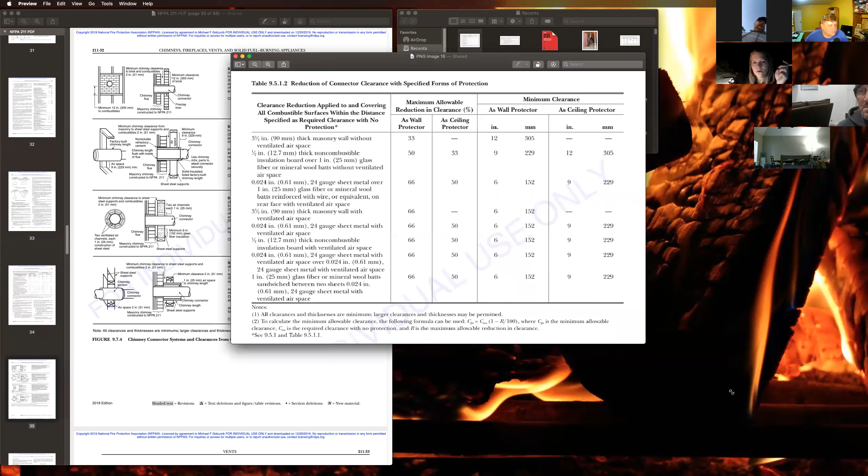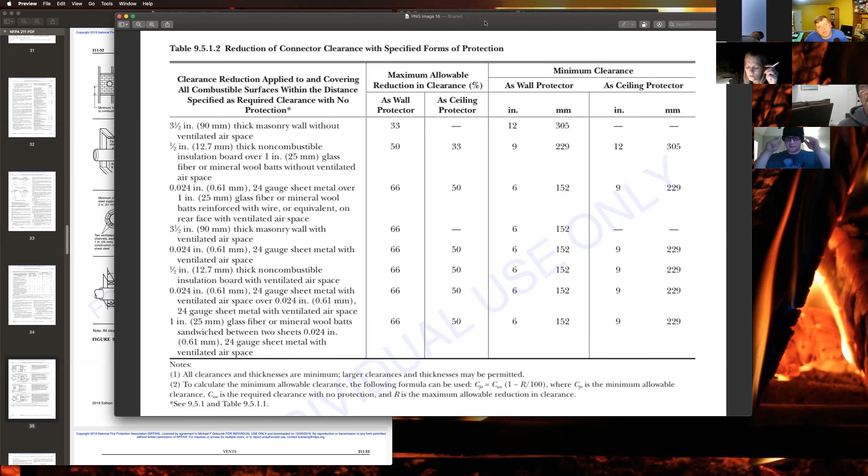So with that said, where is my... not that one. It's... this one? Yes, that one. Okay, so...

It's like daylight there, look at that. Oh, it's dark as shit here. Yeah, it's barely daylight. Like it would be dark walking around outside. There's just a little bit of light left in the sky. And Marty's facing back towards the sunset.

So right here in the middle of my screen, appliances. Chad's having a little bit of an issue with this exact set of numbers, and he wanted me to make sure you guys had this information.

In the testing, they're only asking you a few different things, but the easiest thing to know is that there's only 3 reductions to wall clearance, and there's only 2 reductions to ceiling clearance. Only 3 to wall, 2 to ceiling.

And that's the reduction. Don't worry. Brock, I just finished my dinner as well. There you go. Okay.

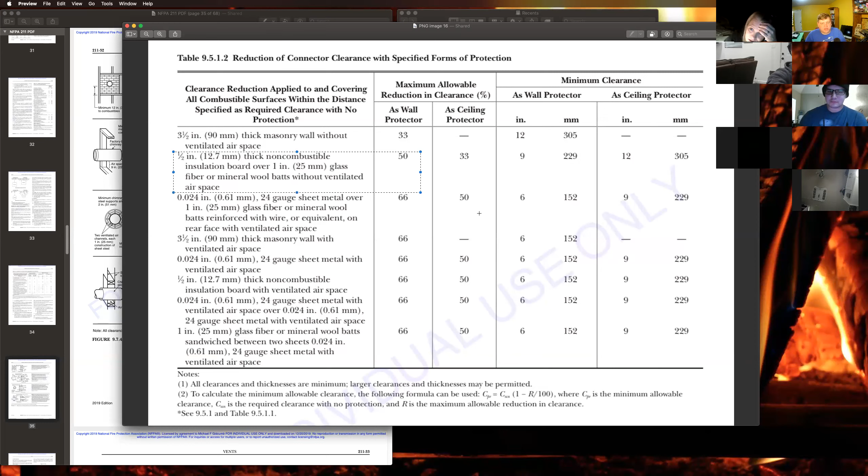How about just this page? Yeah, just this page. Oh well, isn't it in the book? I don't have a book. She doesn't have a book. It's in the NFPA, you can print it out from there. This exact page is in the NFPA.

Yeah, that's where I got this from. I just screenshot the NFPA. If you got the email on Connect Team for NFPA, you can take that and send it to the printer and print out the whole book. How big is that book? About 66 or 67 pages. It's in the NFPA 211 book. If you pull it up on Connect Team, which is what we went through Tuesday night, you can watch that video, it'll show you how to pull it up.

So, ceiling protectors. There's only 2 numbers you need to know for ceiling protectors. The first one: going back to your half inch thick, non-combustible board with no air gap, as a ceiling protector, that's a 33% reduction. And then anything else that it references as a ceiling protector is 50%.

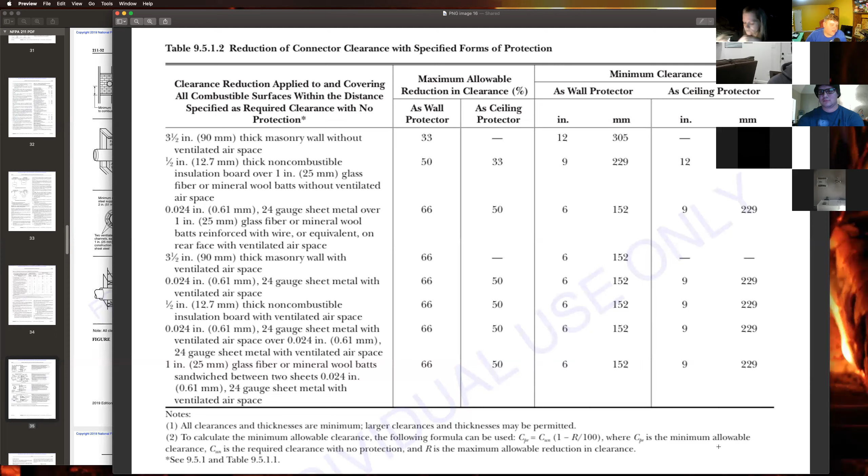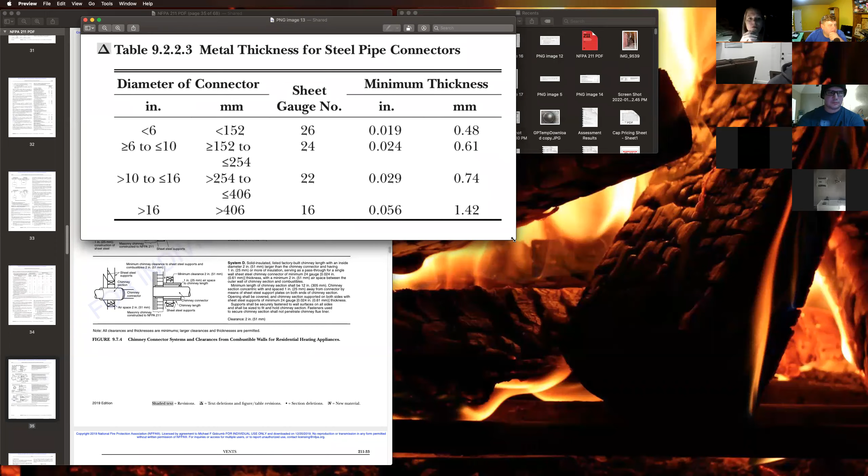Everybody got that? Okay, I'm going to set this off to the side and I'll email this one page. Well, that's fine, and I'll also print that guide off, the NFPA 211 book, like you were telling me. Cody, I just screenshotted it and sent it to Connect Team. I saw that, thank you. You're welcome.

So this is the other set of numbers you need to know - steel pipe connectors. You need to know 26, 24, 22, and 16.

When we're talking about the diameter of the flue pipe - the diameter of your round flue pipe - for individual diameters or ranges of diameters of flue pipe, the sheet metal has to be different thicknesses. As you have a larger diameter flue pipe, you're able to vent more, which means the firebox is going to be larger, and so on. You're going to be moving more heat, so it has to be more heat resistant. To do that, it has to be a thicker metal because it has to stand up.

So less than 6 inches in diameter - does everybody know what a diameter is? Yes, it's the circle from left to right, that is the diameter, right? So a pipe that is less than 6 inches will always be made from 26 gauge sheet metal. Less than 6 inches diameter, always 26 gauge sheet metal.

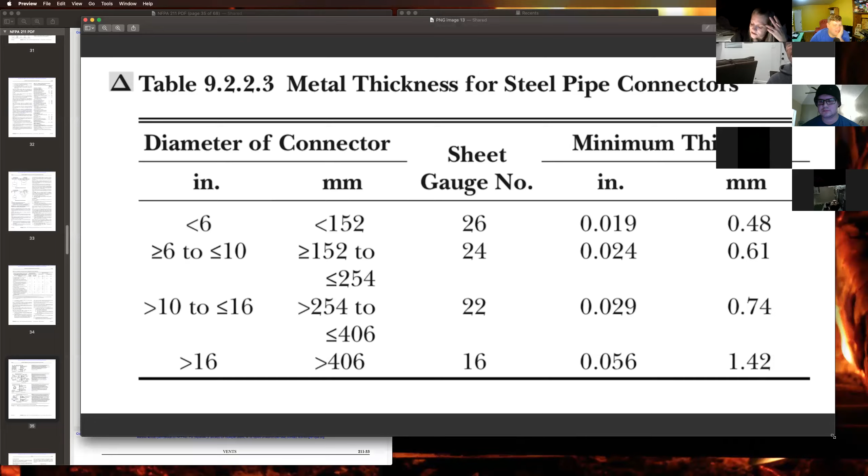The higher the gauge, the thinner the metal. Yep, the more times you hit it.

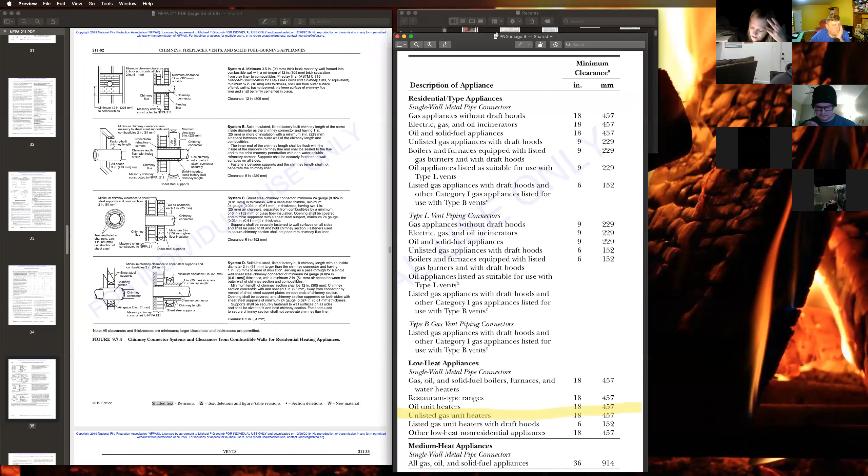I mean, it makes perfect sense once you think about it. It really does, I said. You should hear some of the stuff Joe has for his different ways of remembering, like the UL codes and things.

Okay, the lower the gauge... Mm, see here, so that takes care of those. What was okay?

So the next thing that we're going to be talking about is clearance to combustibles for different appliance types.

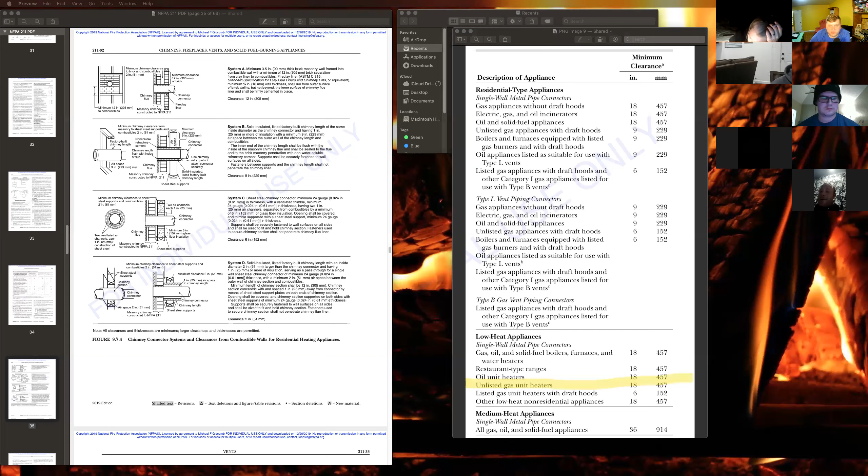Hold on - with that, a wood stove is considered a medium heat appliance with a single wall metal pipe connector. So this is where it gets fun. Medium heat appliances with single wall metal pipe connectors, and that doesn't matter if it's gas, oil, or solid fuel. You said single wall pipe connectors, right?

And it's 36 inches clearance to combustibles. So we know that - a wood stove is 36 inches clearance to combustibles.

And then we're going to come back over here to this other page. One of the questions on the test is: if you have a wood stove, automatically you know 36 inches clearance to combustibles for a wood stove, right?

If you have a wood stove that is behind or in front of a 3.5 inch thick masonry wall with a 1-inch air gap, what is its clearance to combustibles?

So you already know that the stove itself, without any kind of protection, is 36 inches. On this page right here, with the first one that we went over, it's right here - a 3.5 inch thick masonry wall with a ventilated airspace reduces clearance by 66%, or 2/3.

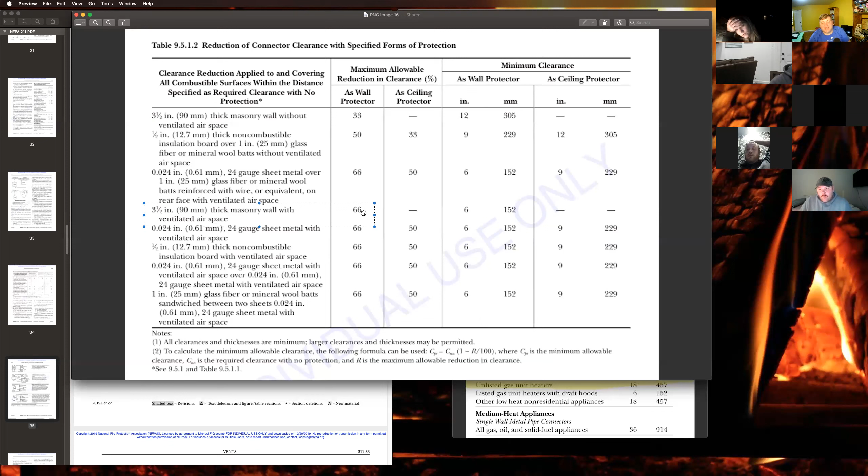So if the wood stove is 36 inches and it's behind the 3.5 inch thick masonry wall with a ventilated airspace, then it's reduced by 2/3. So that means its clearance to combustibles is now only 12 inches.

It's weird because you don't have the number memorized yet, trust me, but it'll make sense. So right at the bottom of this page here, wood stove clearance to combustibles is 36 inches.

The question on the test is if you have a wood stove sitting in front of a brick wall with a 1-inch air gap, how far should it be away from combustible materials? So the wood stove starts at 36 inches, but when you're adding the brick wall with the airspace, you can take some of that 36 inches away. That's where this little paper comes in right here that says you're going to reduce that 36 inches by 66%.

So it's like a 66% discount at Macy's or Best Buy, open box, 66% off.

So if your wood stove needs 3 foot of space before it can get near a wall that could catch on fire, but you don't want it sticking 3 feet out into the room, the easiest way to get it really close to the wall is to build up a brick wall with a 1-inch air gap, and then the thing can be 12 inches away from the combustible wall, because it's reducing it 66%. So the brick wall isn't considered the combustible wall - it's a masonry product, a non-combustible wall. So we're talking clearance to the combustible.

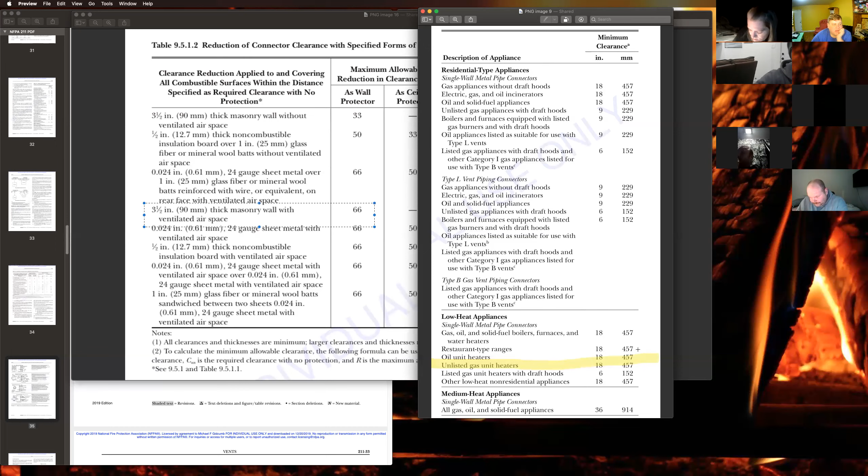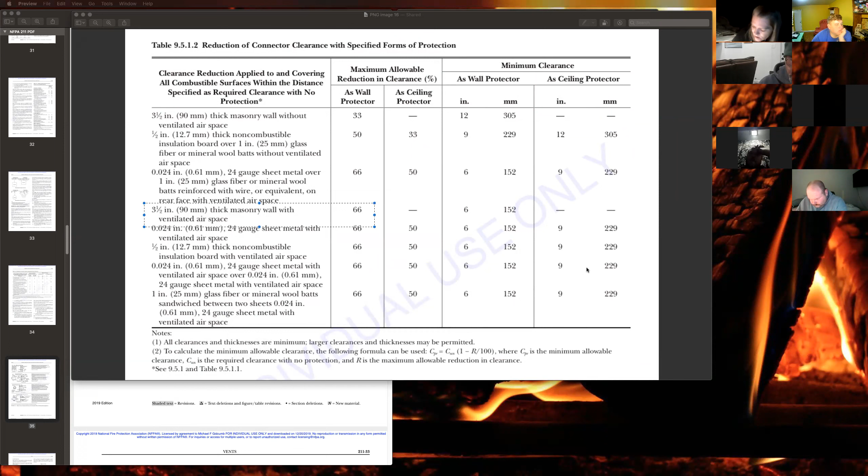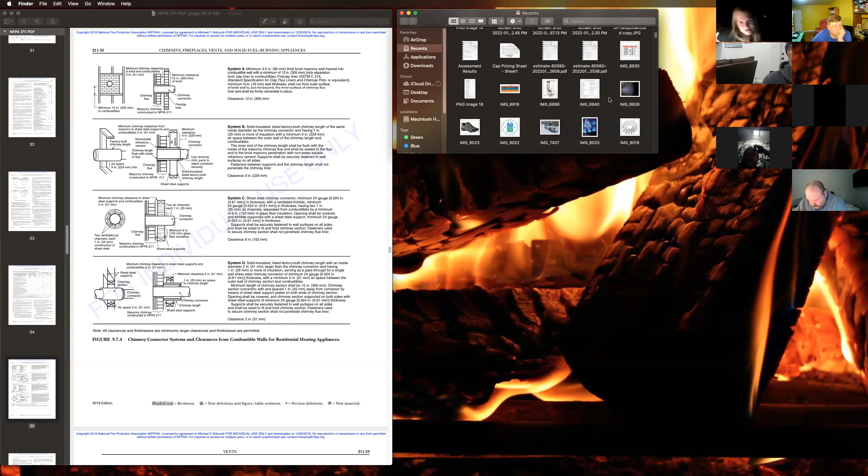So hold on, I got him putting this in parentheses: X is equal to the distance between the outer wall of the flue pipe and the combustible material. Now this literally only has to be 1 foot - that's if you had a brick wall right here with the 1 inch airspace. Now this flue can scoot over there. That's all.

When that question kept coming, you know what I was picturing in my head? A freaking spark arrestor, I don't know why - that's why I kept getting it wrong. I was picturing a spark arrestor, seriously. Okay, so we all need like a Cody and a Brian sitting right next to us to draw diagrams, dang it.

That's why we're here.

Another thing I'm going to send you guys is this one. These pictures are on the Connect Team test. So if you take the 45 degree test on Connect Team, the pictures are in it. I wanted to give you these pages so when it asks a question about the wood stove with the masonry wall, I give you the information in the pictures to pick the right thing. All you have to do is look at the picture and read it, and that will help you associate the question with the picture.

So in this one, one of the questions was the clearance: what is the clearance to combustibles if a mantel protrudes 3 inches, which is this right here. For the clearance to combustibles, you come down, you come over, you come down. There you go, it's 14 inches.

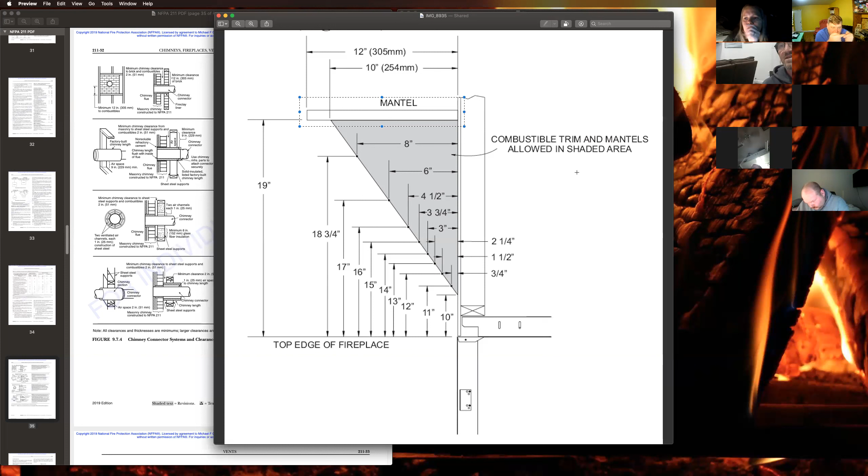Is that one of the questions that was wrong? Yes, that's one of the questions that's wrong. Right, anything under 1.5 inches is 6 inches between the firebox and where the mantle can be, as long as it protrudes less than 1.5 inches. And then anything more than 1.5 inches, at 1.5 inches it's 12. Less than 1.5 is 6, anything more than 1.5 is 12, is what it says. But you're saying it's actually 14.

At 3 inches, which is the question on the test, at 3 inches. So if a mantel sticks out from the wall 3 inches, how far above the opening of the fireplace does it need to be? The answer is 14 inches. Okay, so I've got my mantle here - when you say protrude, you mean how far it's sticking out, like here. So if it's sticking out 3 inches from the top of the firebox, the mantle has to be 14 inches.

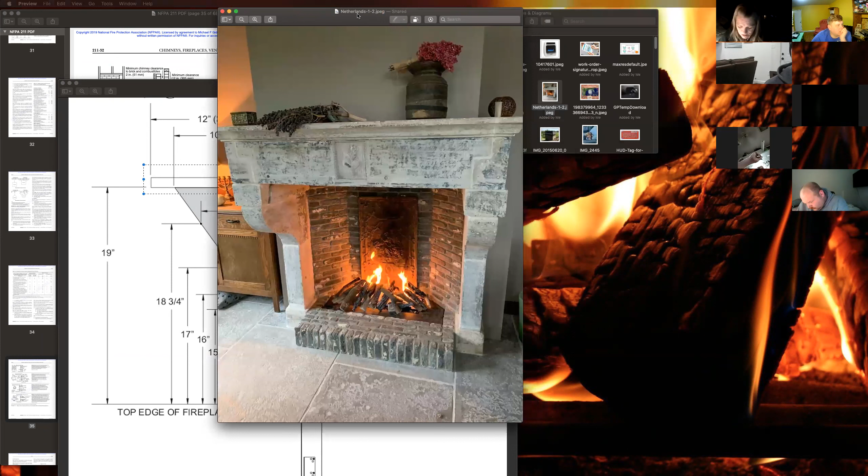But that's not how it says it on the practice thing - it just literally says 12. It doesn't say that's for more than the 1.5 inch. Yeah, that's the practice test.

That's why I was asking if that was one of the ones that felt like it was wrong. Right, so here we go.

This diagram is in the NFPA - sorry, NFPA. Yeah, I'm learning, okay? So this right here is the mantel up here - right, so this bit here is the mantle. So this mantle, if it sticks out 3 inches, it has to be 14 inches - this distance here has to measure 14 inches.

So this is my ignorance - is a mantel always just the top portion that goes across? No, it can be the side too, but that's a different measurement. This wider portion under the edge you're talking about, that's your clearance space. This one isn't a great picture to use for that, but the mantle is generally where somebody's going to set stuff on, like a little ledge across, right? So yes, that's that area right there.

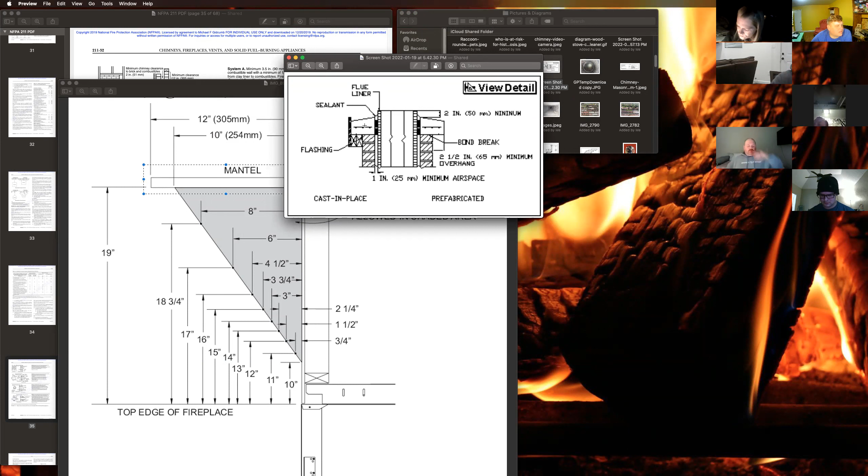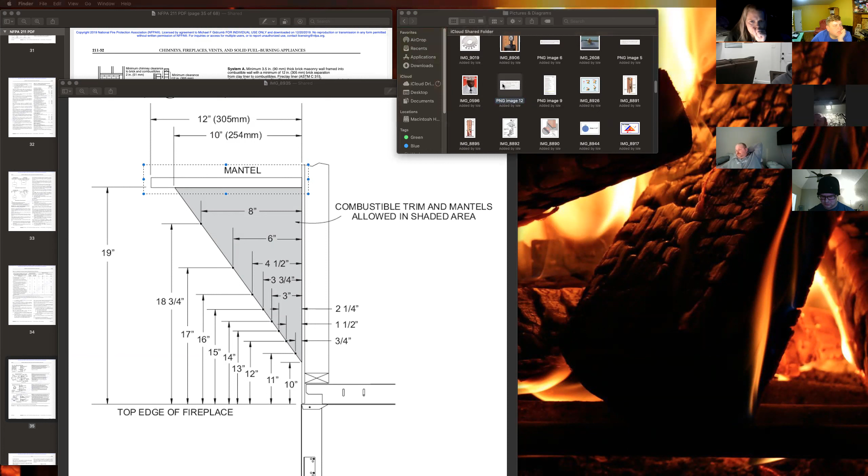Where are we? I think this one here. No, not that one - that one there. Check half-inch side laps - I'm looking at a really small representation of all this stuff, trying to find the right one. Oh, here we go. This is... nope, that one's still wrong. Okay, I'll have to find the right picture for that one.

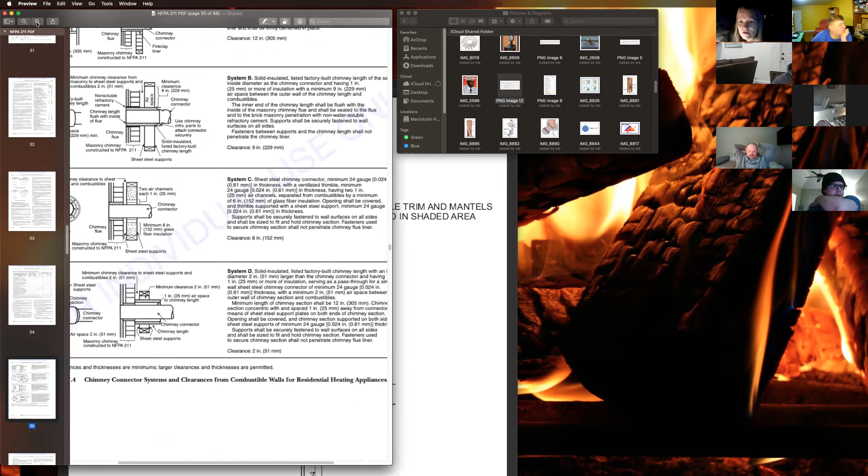That was the mantel. What are you - where's my other measurements?

Did I already pull it up? Oh, actually I've already pulled it up. Let's take shots because I would literally be drunk already.

Okay, so it's going to ask you about the wall thimble passing through a 3.5-inch masonry wall and its clearance to combustibles.

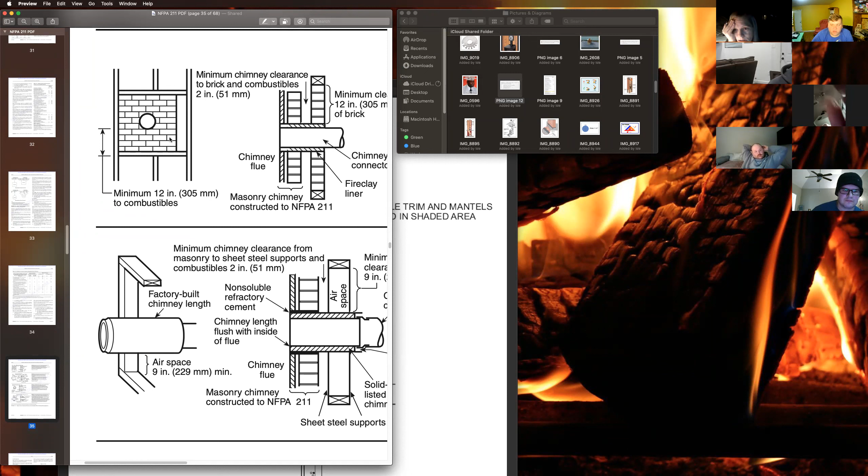So it's a 3.5-inch masonry wall. Any single wall connector pipe that passes through a wall has to go through a thimble. A thimble is literally a metal sleeve that goes through the wall first, and then the pipe, being slightly smaller, goes through that. An example would be like a wood stove, right? The thimble is slid into the wall and then the pipe is slid through it.

So with the previous question that we worked on, for any single wall pipe or connector that is for a medium heat appliance, what is the standard clearance to combustibles?

Okay, 36 inches, right, 36. So now we're passing through 3.5 inches of masonry with a 1 inch air gap, so that reduces it. We're going to reduce that 36 inches, reduce it by 66.

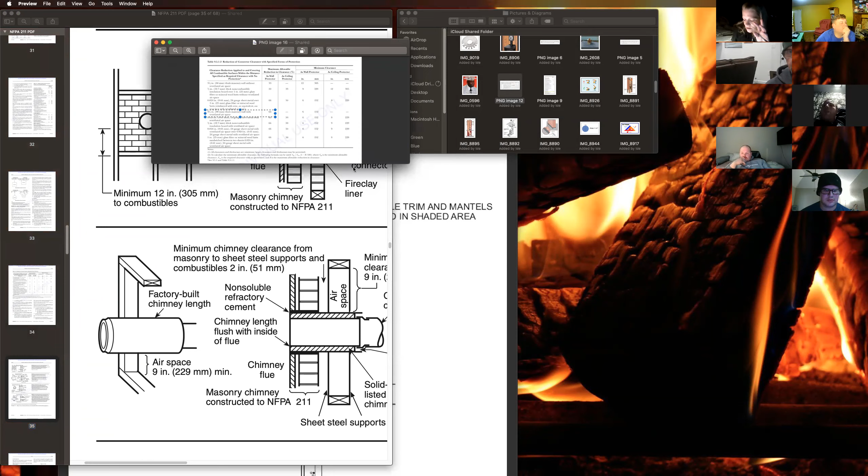With masonry, you have to know the clearance of the original appliance, and then you can do the clearance minus the reduction for the wall. So we're back to a wood stove. We know it's 36 inches, and it's going to go through a thimble that's in a wall that has 3.5 inches of masonry with a 1 inch air gap,

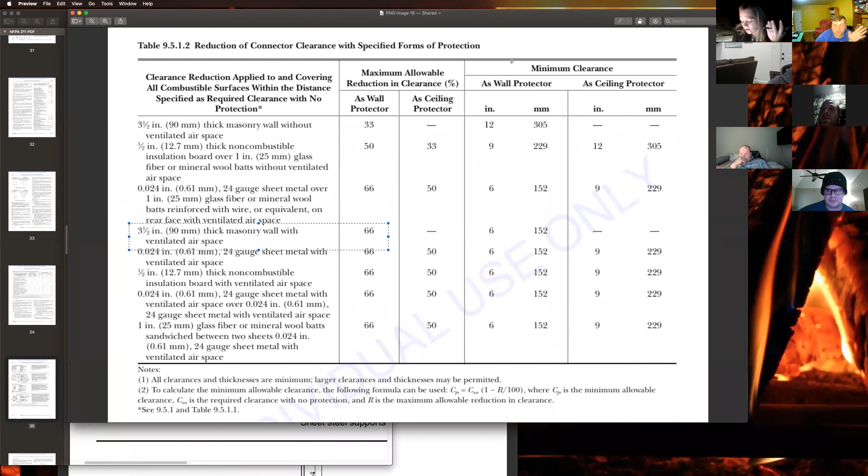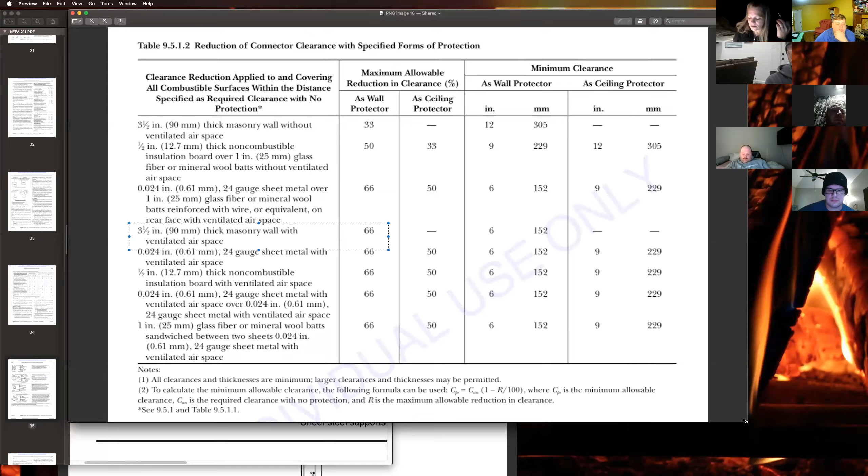which is going to reduce it by how much? Does the thimble not reduce it more? You're still reducing by the same amount overall. Is it 12? It's 12.25, but if you're doing the exact math, the book says 12.24. But in the book it says 12 inches. Okay, 12 inches is the number to know.

See, I told you it's easy. If not, you're just now hearing this for the first time. Once you've looked at it a few times, it's a lot easier. Same thing with the prefab masonry, right? 12 inches.

What do you mean? Would it be the same clearance to combustibles with something like that? I don't know, you've got an NFPA. Is a prefab a single wall connector or a dual wall connector? Double wall connector? So we'd have to know the clearance to combustibles based on that.

What is the easiest place to find information on clearance to combustibles for any prefab fireplace? The NFPA 211? Nope, the easiest place is the manufacturer's instructions. The manufacturer's installation manual. Flashcards, baby, flashcards.

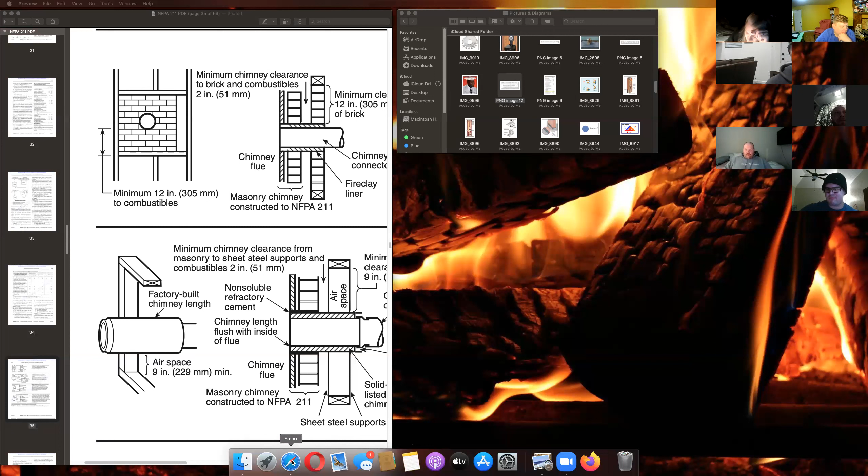Exterior chimney clearance to combustible. Got a nice little refresher on that today, on that last one. The exterior chimney clearance to combustible is 1 inch.

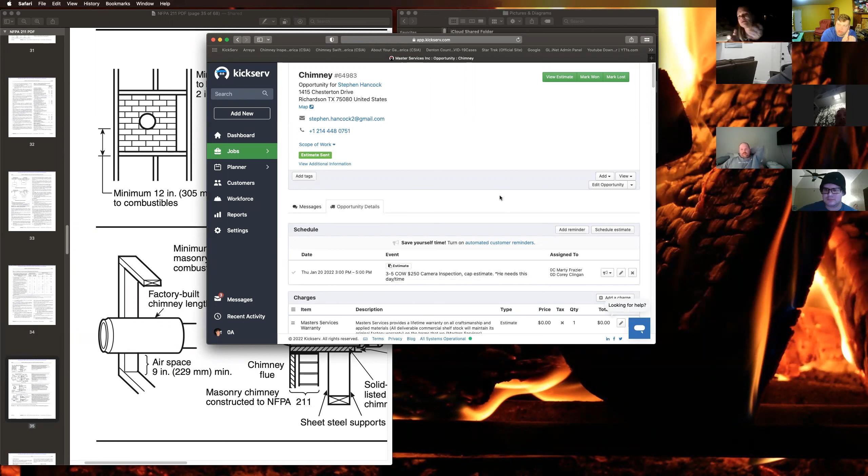So when you're saying interior, exterior, I know you guys are probably tired of hearing me talk, but are we talking inside the home versus outside the home? Interior means the chimney is in the middle of the house and comes up through the roof. Exterior is when the chimney's on the side of the house, on an exterior wall. So interior means middle of home, and exterior means when it's on an exterior wall, side.

This is the one that Corey and Marty were at earlier. They were talking about, oh my God, what is that? This chimney going up through the middle of the house, right up here. They were worried about the wood touching the brick at this point, because they were worried about clearance to combustibles.

But when we measure for clearance to combustibles, what are we measuring from and to? From the wood to the brick? We're measuring from the outer wall of the flue pipe to the combustible material. So the flue pipe is running through the center here, inside the brick.

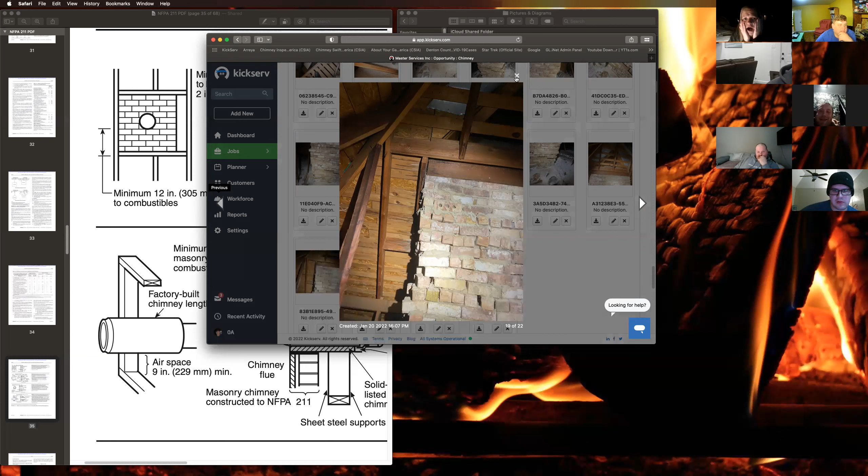Assuming it has a 4-inch air gap, it's okay. Well, even if it has a half inch air gap, it's still okay, because this chimney is interior to the house. So if it has a half inch air gap and this is 3.5 inch brick, that's 4 inches between the flue pipe and the combustible wood. That's double what it needs since it's an interior chimney, it only needs 2 inches.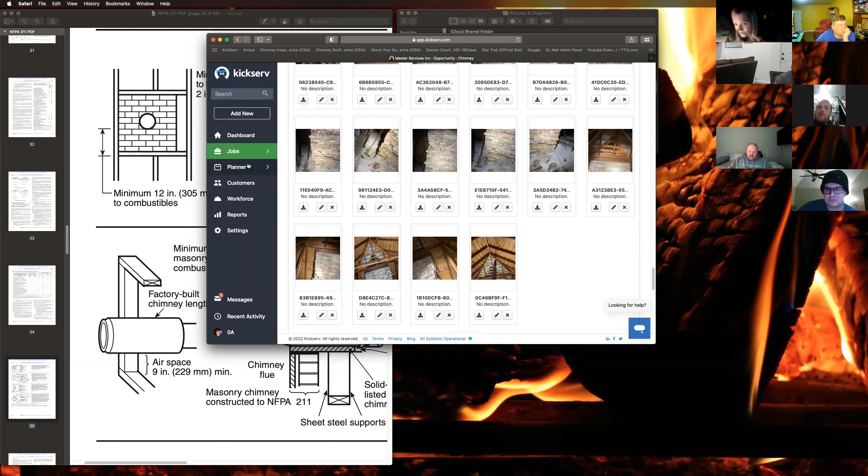They were just looking at it because they saw wood touching brick, and there's a fireplace down there. So I'm just in complete awe of how they stacked that brick. It's never pretty in the attic, it's never pretty in the getting over to it on outside. Oh, it's horrible on the outside too.

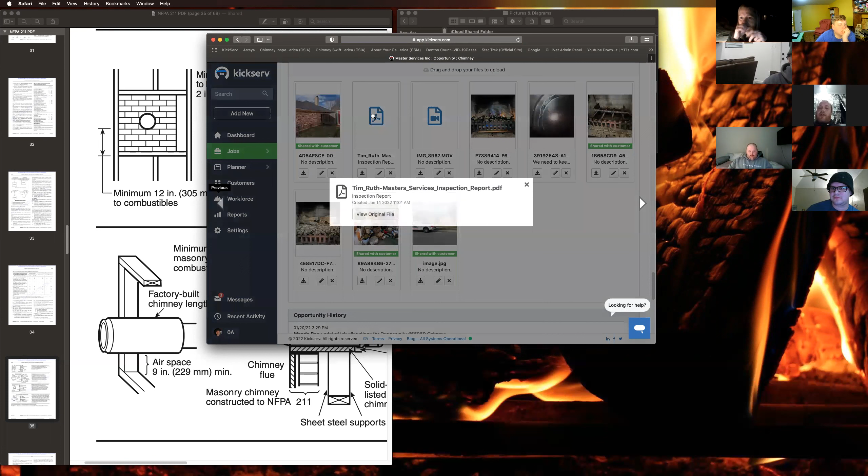So when you guys are out here doing these inspections and you're inside the attic like that, you've obviously already been downstairs or wherever and been at the firebox itself. Have you already run the camera so you have an idea of what's going on? Like, how do you know the flue isn't crooked inside and now you don't have your 4 inches, your 2 inches? How are you judging that?

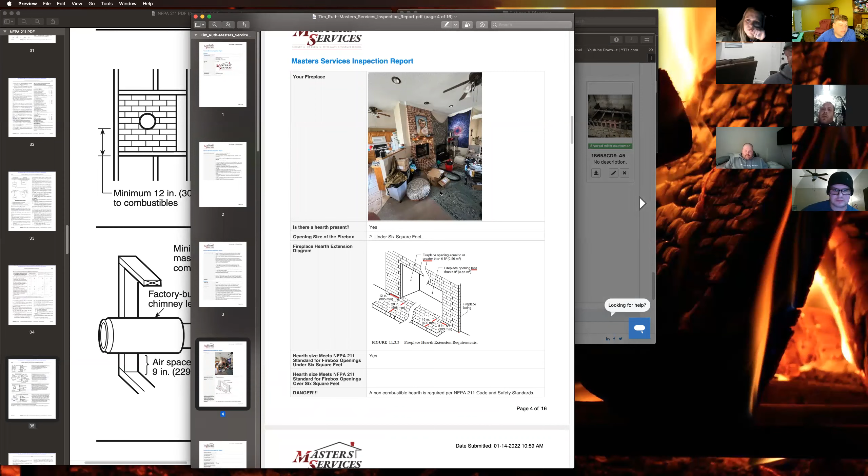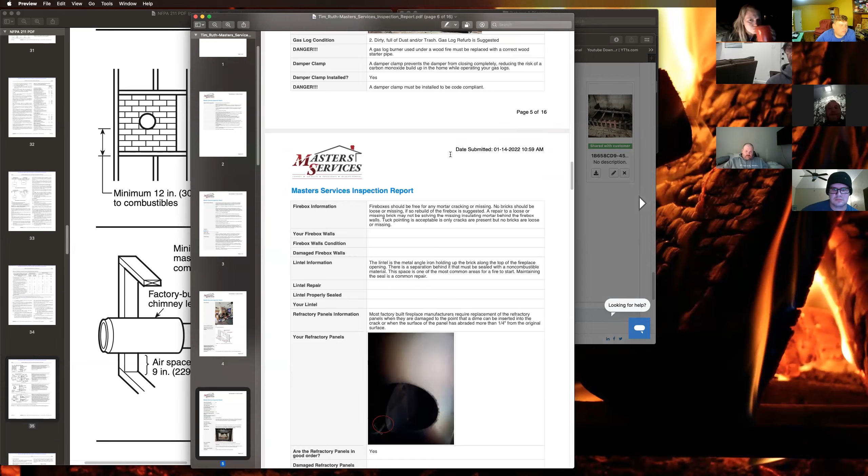You have a cracked flue, that's a whole different problem. But you get what I'm saying? It should run straight up the center and then they build around it. There's no way to tell if it really has the air gap without a level 3 inspection, assuming masonry, they built it correctly. That's when we get into another number that we're gonna know.

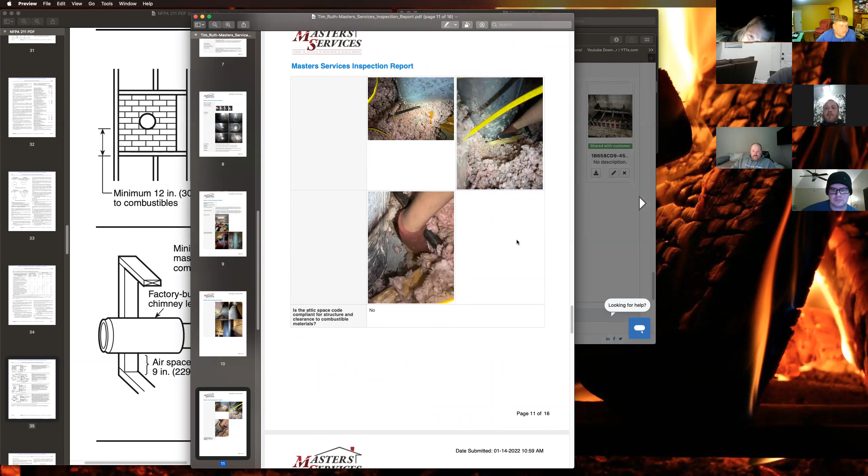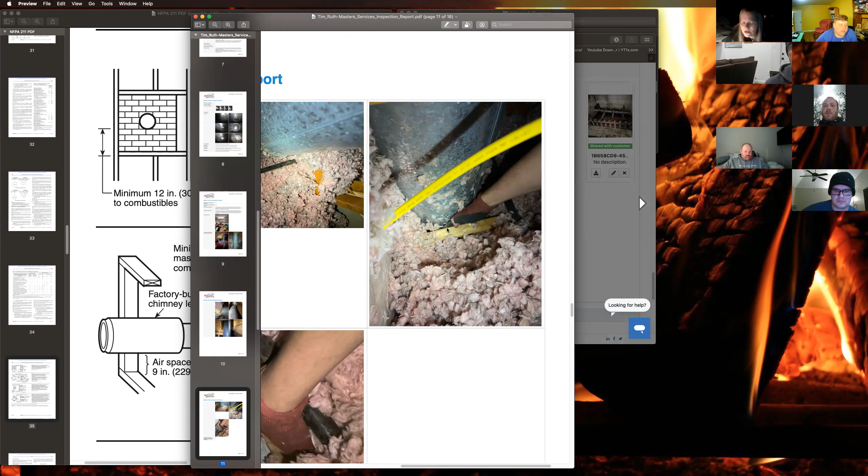So on this one, this is the customer we were talking about earlier, Angela. Down here in the inspection reports, when it asks about did you get in the attic, like that, right? So we're looking, this is the fire stop here, and we're looking for the clearance to combustibles. So we have areas like this, which isn't really, but what I'm trying to understand, isn't that insulation considered combustible?

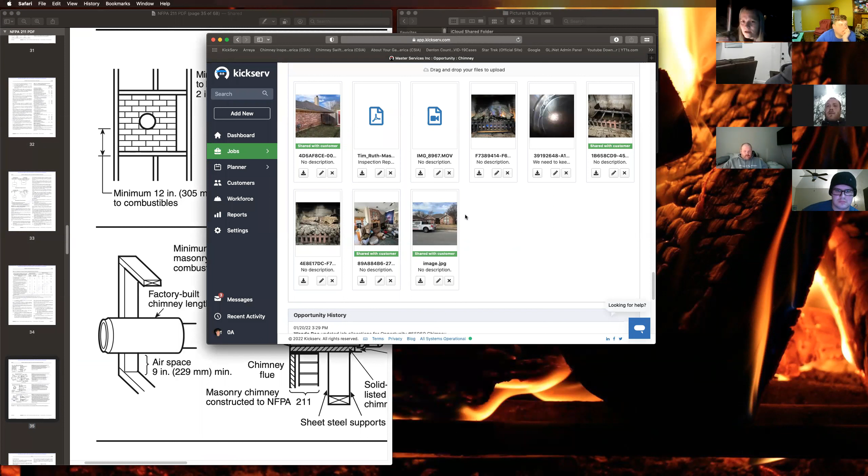The insulation should never be touching the flue pipe. That is one of the questions: should the flue pipe ever have insulation touching it? The answer is no. And then we're looking, you see how Corey's got his hand down in there, he's trying to show that the clearance to combustibles between the pipe and the wood is not there either.

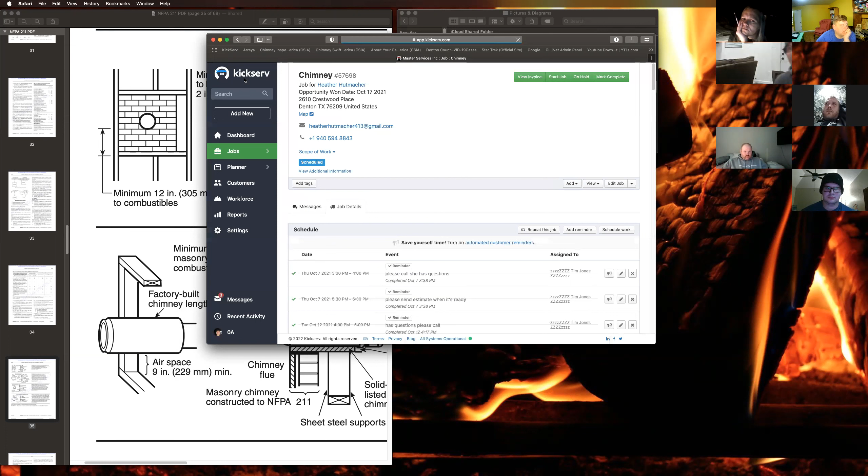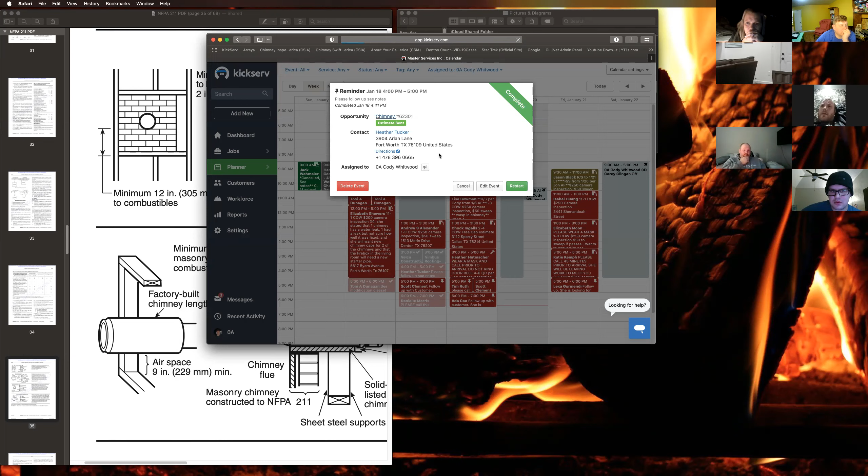So this is a prefab, right? Yeah, it's got the metal piping. And do they run them through the middle of the home like that with nothing around them? Yes, because it only has to have 2 inches of clearance, so as long as you don't have any combustible material within 2 inches, it's good, if it's a double wall or dual wall pipe.

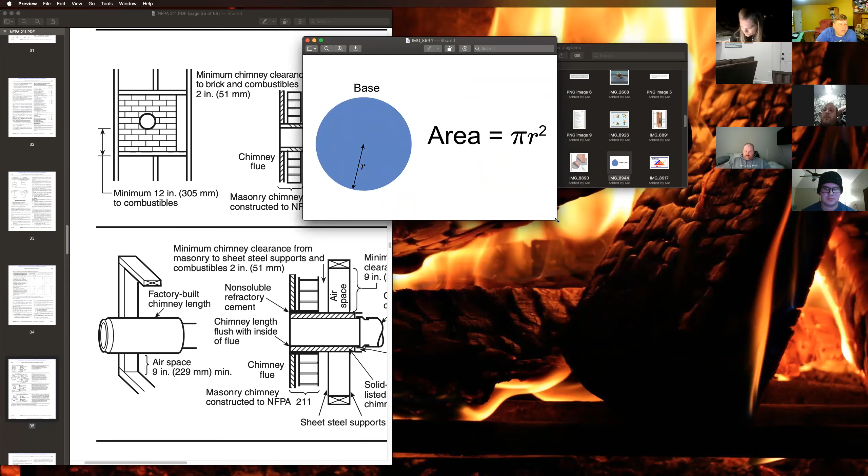Another good masonry to look at would be Jason Babb if you're looking for one. No, prefabs are 2-inch, masonry is essentially 4-inch, or terracotta is, but if you have brick in front of it, that's another thing.

So another number you guys need to know is how to find the area of a circle. I just learned this today - I never thought I'd use this after school. Do you know how to find the volume of a sphere? No, let's not confuse Angela. Okay, so the area of a circle - this gets a little wonky.

So if you're trying to find the area of, let's say, an 8-inch flue pipe - when we say 8-inch flue pipe, we're talking about the inside diameter, side to side, from my fingertips to my thumb tips down here. That's 8 inches.

To find the area of the circle, we need to know the radius of the circle. So just from this center point here out towards the edge, as it radiates like a beam of light. If you imagine the sun being at the center of the circle and radiating heat and light towards the outside of the circle, that's the radius. So I've got my circle from here to here - that equals the radius, which is R. The radius is always half of the diameter.

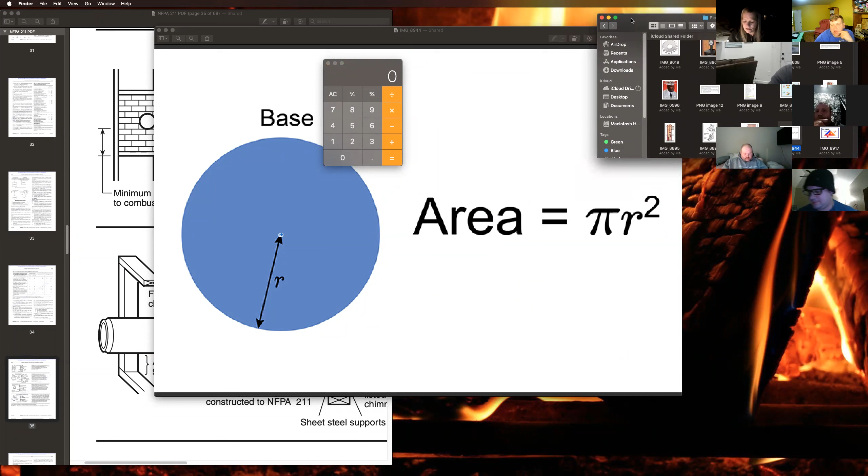Okay, you want to know why we don't do diameter times pi? Okay, wait, so the area equals - give me how you were breaking it down just now. Area is radius times radius.

I can't go any bigger. Okay, so it's radius times the radius times pi, which is 3.14. So for Josh, I want to show you the difference here, because Josh doesn't understand why we don't just do the diameter times pi.

The diameter is twice the radius, right? It's twice as much as the radius. So it's 2 times the radius, not the radius times the radius.

So if we're talking about an 8-inch flue pipe, that means the radius is 4. So 4 times 4 times 3.14 gives us 50.24.

Now, if we do the diameter times pi, which is 8 times 3.14, it's 25.12, which is exactly half. And if you multiply that by 2...

There was a question, and I know it's in here, okay, it's this one.

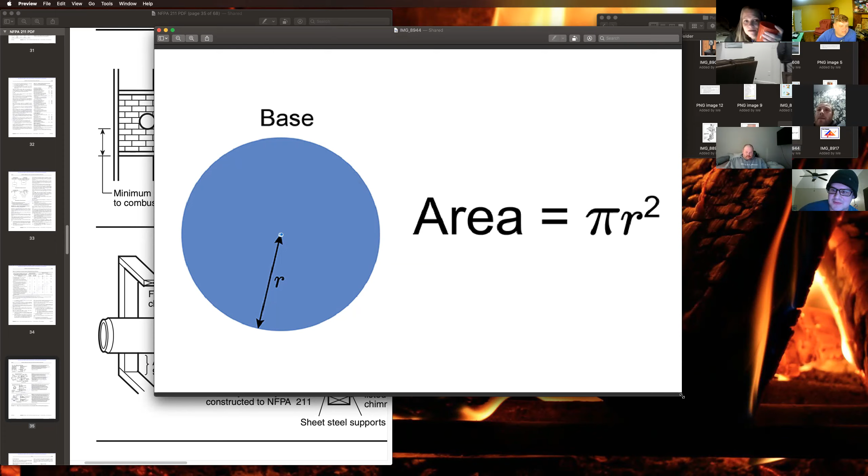True or false? False. Right, because that's for a circle.

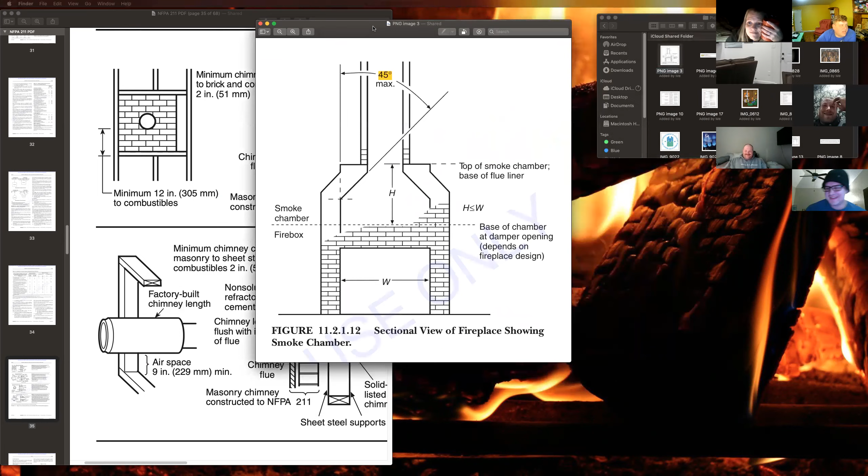I'll be damned, the flashcards are working. It's amazing when that happens, right? Yeah, now I just gotta finish making them. So we're mathing it up, man, we're a bunch of math heads.

Are you gonna be at the office tomorrow? Because I'm gonna stab you with my pencil. No, no, oh Jesus, no. He's like, maybe I was, but not now. Gina and Lisa decided that I could go to Keller and then drive to Dallas for 3 jobs. Oh, that's right, I forgot about that, I saw that. Okay, more math, more math.

The maximum angle of a smoke chamber is 45 degrees. Okay, now how do you find the maximum height of a smoke chamber?

The width of the box, where at? At the firebox opening, the width of the firebox opening. So at the front of the fireplace, right here, as you look at it when you come into the room, left to right, the width of that opening is the maximum height for the smoke chamber. So there's this little equation saying the height of the smoke chamber is less than or equal to the width of the firebox.

All right, start back at the beginning. What was your full question at the very beginning? Not the 45-degree angle, but the first question: how do you find the maximum height of the smoke chamber? Okay, so that's the question.

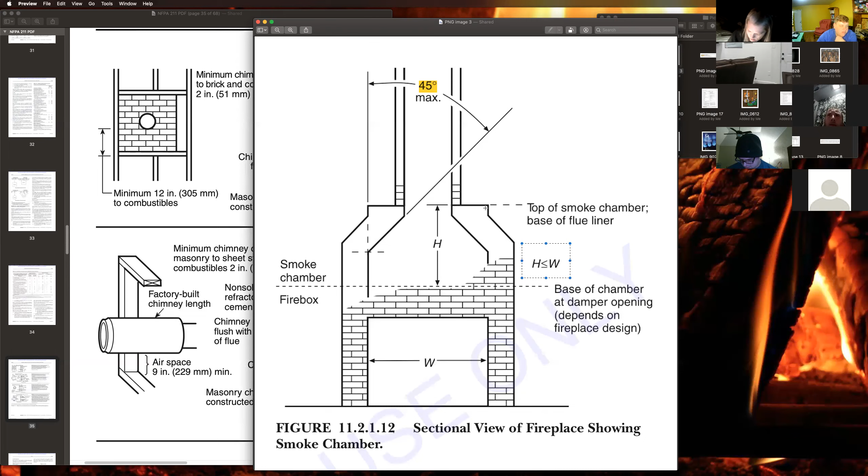And the answer is width of the fireplace opening. And your mathematical equation, if you will, for that, so that you can define it - I'll give you this sheet as well. So it'd be: the height of the smoke chamber, which is H, is less than or equal to the width, W, which is the width of the fireplace opening.

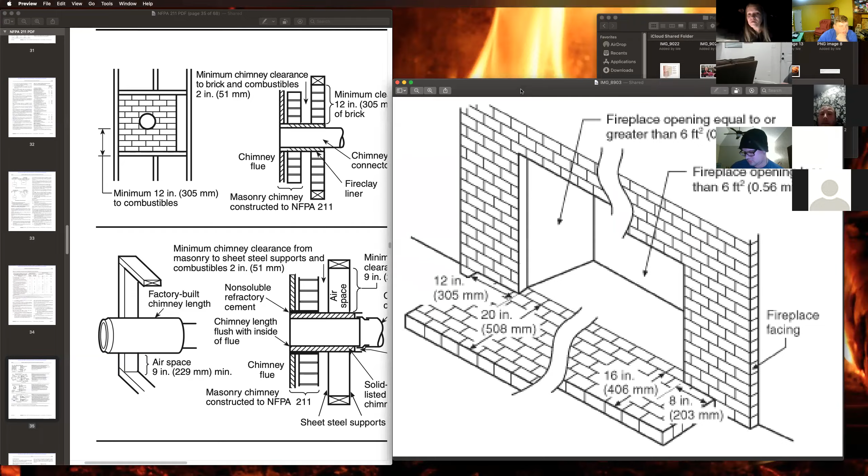I remember these. I remember this diagram. Now this is not the best picture and it's really low res.

That's your fire. Only two things to know when you're measuring for the hearth or the hearth extension. By definition, the hearth is the actual floor of the firebox. The non-combustible material in front of the hearth is the hearth extension. Anything from where the actual firebox stops, right here at the front forward, that's considered the extension.

Anything from the front of the firebox back is considered the hearth. So if you know the opening of the firebox, we're finding the surface area of the firebox by square feet. Josh, do you know how to calculate the opening of a firebox in square feet?

Yeah, length times the width. But you're going to measure in inches, so you need one more thing. Length times width times height? No, or depth - that's volume. So you're measuring in inches, right? The question on the test is if you have a firebox that is 38 inches wide and 27 inches tall...

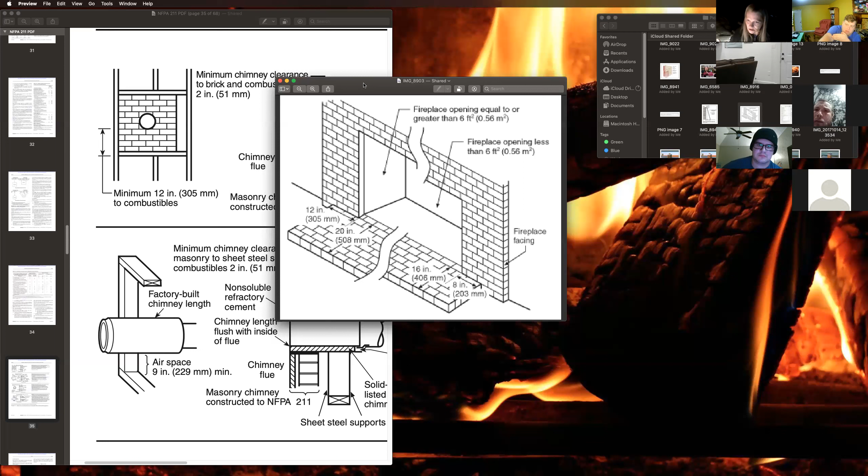What size does the hearth extension need to be? So anything that is 6 square feet or greater... it's 12 and 20. It's 12 inches off to the sides of the firebox, and 20 inches out from the firebox.

Yes. So the way that we get that number, let me pull this back up here - I should really just keep this open. So the way we get that number, it's 38 inches wide and 27 inches tall, right? So we're gonna do 38 times 27 equals 1,026.

That's square inches. So we need to break that down into square feet. So how many inches are in a foot? Because square feet, when I do 12 times 12, that's 144. So 144 square inches is 1 square foot, right?

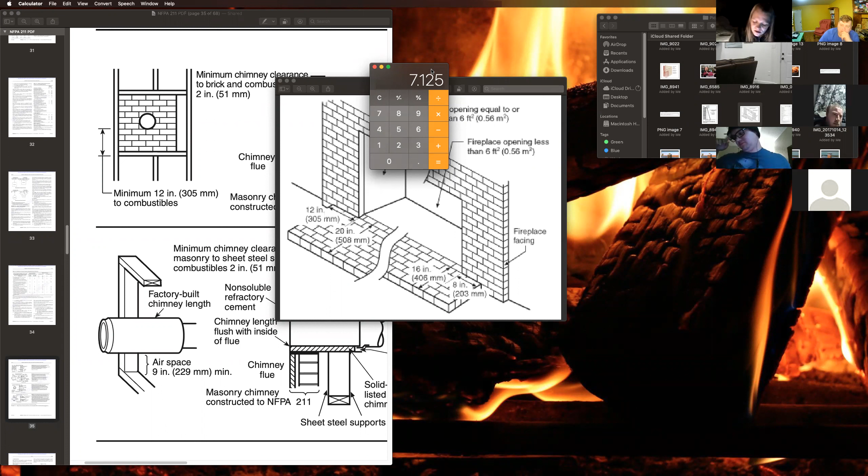So we're going to divide our 1,026 by 144. So 38 times 27, divided by 144, gives me 7.125, or 7 and 1/8 square feet. So you said 38 times 27? Uh-huh. And to get square feet, you divide it by 144.

Divided by 144. You got that, Josh? I see the eyebrows going. I'm just conceiving - I'm locked into this. This is the equation for figuring out the square foot of an area. This is the equation to figure out the opening of the firebox in square feet.

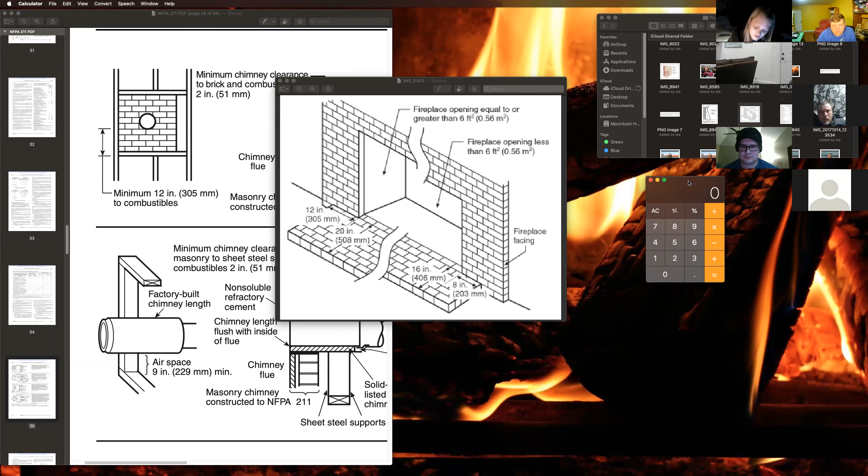This is an equation to figure out the square feet of how big the caps are or the chimney as well. So estimators should be using this to know how big their caps are. Exactly - this is how you find the opening of the firebox. Length times width divided by 144.

All right, so Josh, if you measure a cap that's 10 foot 3 inches by 3 foot 3 inches, which is 39 inches, what would that be for gas? That'd be 123 inches - I'd actually have to measure. You're gonna take 123 times 39, and then you're gonna divide it by 144, and you're gonna come out with just shy of 34 square feet.

So this is the square foot of the area - that's why you need it to sell for the price. So this is how you figure out the square foot of an area. So if we're not using that equation to calculate your cap sizes, you're undercharging or overcharging.

You're charging for caps incorrectly. So if you're going out and selling every cap for whatever the price is in Kickserv, it could be a third of what it needs to be. That's why we have linked the cap pricing sheet, and it's in square feet.

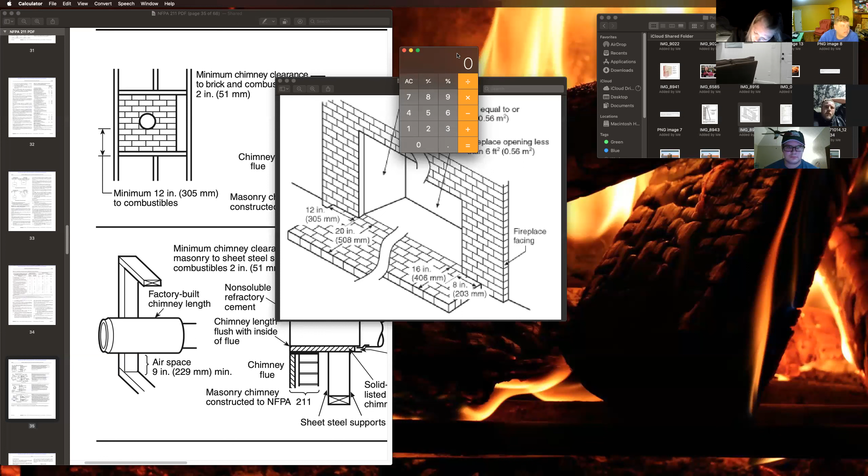And the height of the chimney. The 144 is a square foot—it's 12 times 12 is 144. So it's the width of the firebox opening times the height of the firebox opening, divided by 144, gives you the square footage of the firebox opening. That's how you know which hearth extension you need.

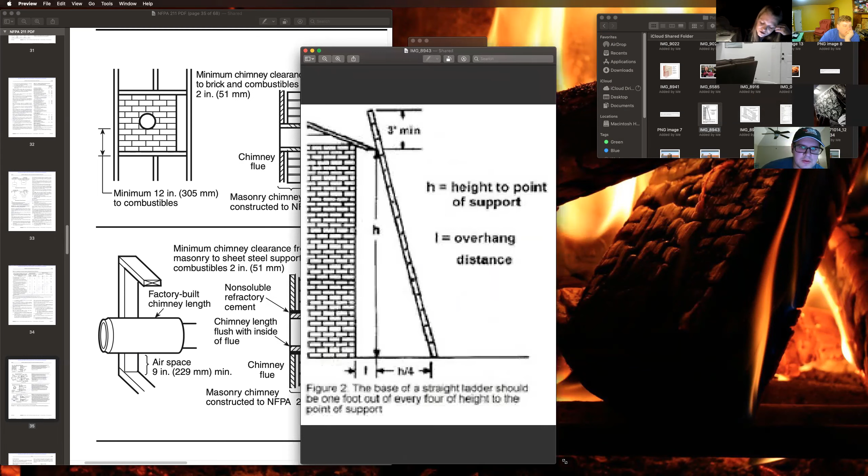They only come in 2 flavors. Angela already said 20 and 12. If it's less than 6 square feet, it's 16 and 8. So width times height—that is key. I don't know if they're going to use it like that, but it's less than 6 square feet, or greater.

144 equals—okay, and 144 is square feet because it's 12 inches times 12. That's horrible, I know. I only needed it big enough to go on the Quizlet and Connecteam.

So the base should be 1 foot out from the floor—this is referencing ladder height, how to set up a ladder according to OSHA. OSHA says that for every 4 feet from the ground up that a ladder goes, it needs to come out 1 foot.

So your proper ratio for your ladder setup is 4 to 1. You're 4 to 1. Ratio for ladder setup is 4 to 1. I remember that on my flashcards—4 to 1, okay.

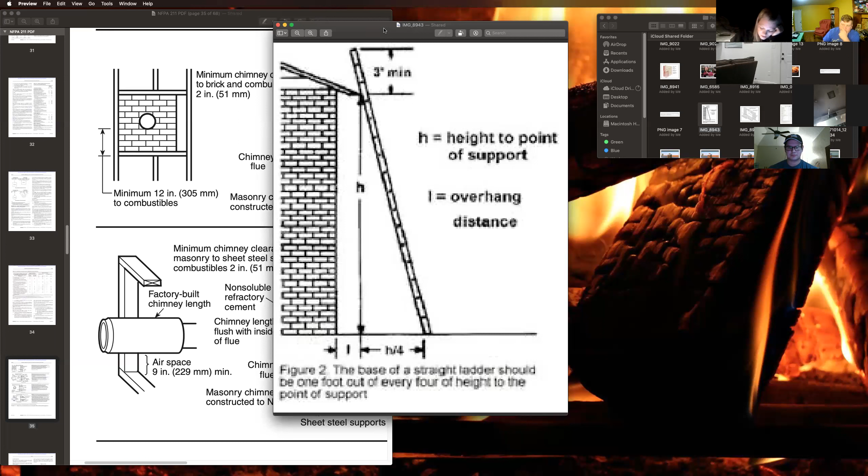But if you were going to mathematically write it out, how would I write it out? Height divided by 4—16 divided by 4, right? It's the height divided by 4. So h divided by 4 will give you the distance out. h divided by 4 is equivalent to d, or the depth to the wall.

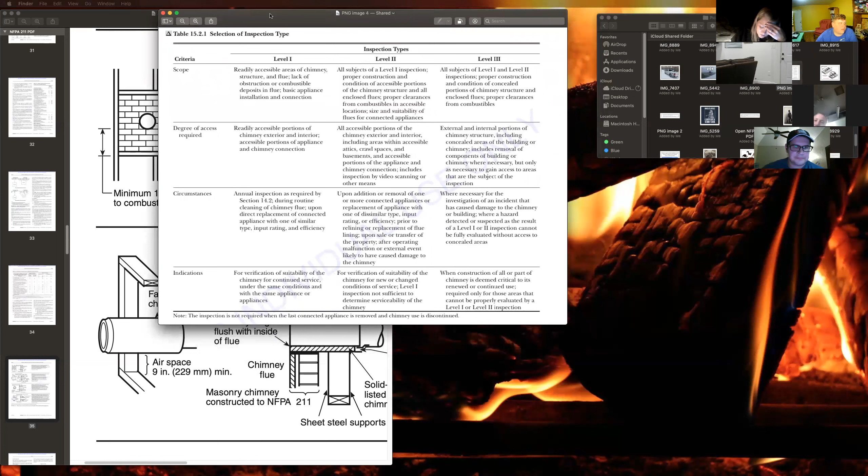Okay, I got that. So if it's 16 up, divide that by... okay, I just wanted to make sure, because I got to make it make sense in my head. I'm sorry. No, that's why we're here. Yeah, don't be sorry.

We're all educated here. Very last thing, and then I'm going to let you guys go because I know everybody's working tomorrow. The different levels of inspection—you guys just need to know what is included in each level. There's only 3 levels, and every level up includes everything before it. So one of the questions is, what level of inspection uses basic hand tools and ladders?

The answer is level 2. Level 1 doesn't use a ladder, but it still accesses certain areas to check the installation and clearance to combustibles. So it's anywhere that's easily accessible, you still do in a level 1. But anything you can do with your eye, that's level 1.

Level 2 is when you add the tools, the ladders, and the video scanning. Level 3 is all that other stuff, and that's when you start cutting holes in the wall and breaking brick out of the chimney to look at what's going on the inside. Level 3 is the destructive one, where you're demoing.

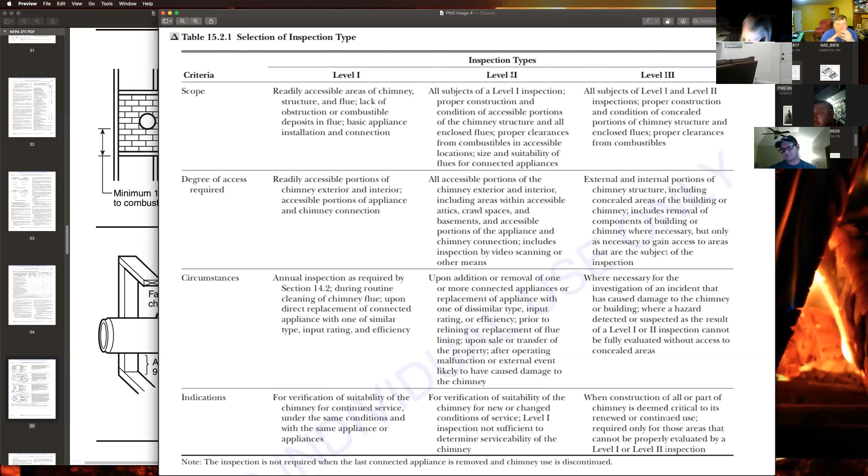Where's the hip replacement? Then level 3 is surgery. Level 3 is when they're literally cutting you open to see how bad the tumor is, because they can't see it so well, so they're going to cut you open to see what's going on.

General practitioner, specialist. My boyfriend's gonna look at these notes and be like, what the hell are you talking about going to surgery for? He's going to think you're cutting him up. No, but he is making dinner, so thank you for the class.

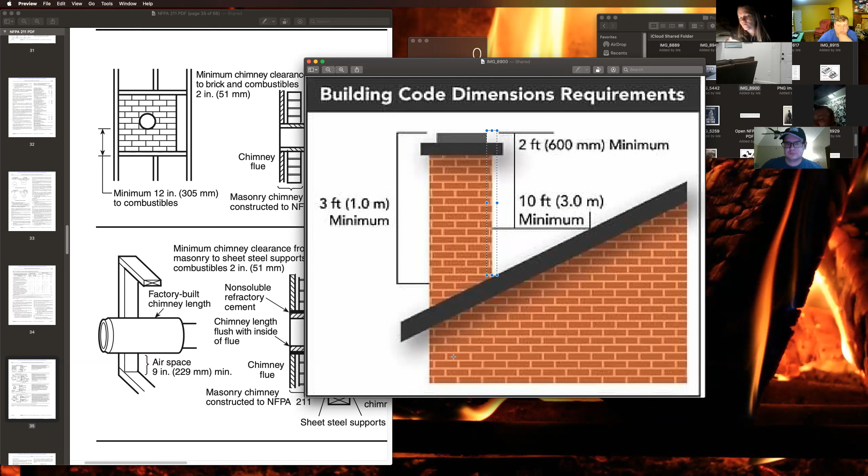So the question is, the flue must be X taller than any structure within 10 feet. It's 2 feet taller, or 24 inches, depending on the way they ask it. And then any chimney that penetrates a roof line must be 3 feet.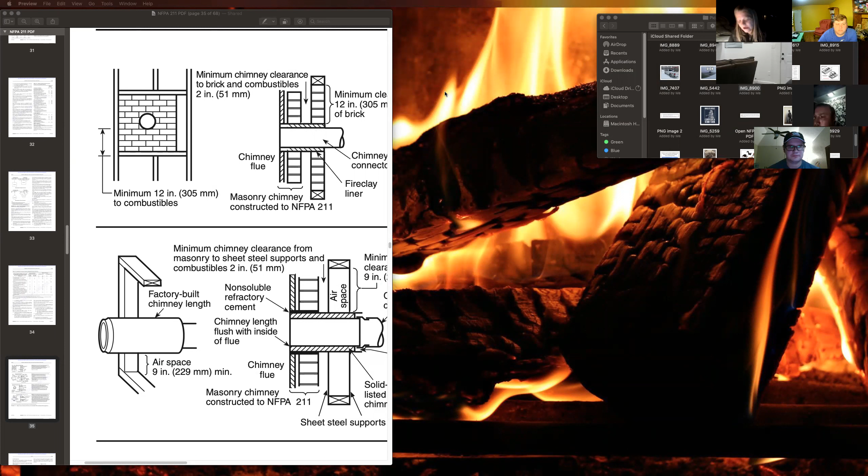Oh, and I have to ask, man, is grandfathered in still a thing, right? No, it's never been a thing. Okay, so yeah, it's bullshit.

Well, if you watch the Alan Rush videos I've been trying to get everybody to watch, one of his rebuttals to the customer's number one complaint is, well, isn't this grandfathered in? And the rebuttal is, absolutely, the structure is grandfathered in, but not the codes and standards. Then you ask them why the codes and standards are continually changing, and they're going to tell you it's to keep us safe and make sure everything's right. So the codes and standards change. The structure in the way it's constructed is grandfathered in, as long as the codes and standards can be enforced compliantly.

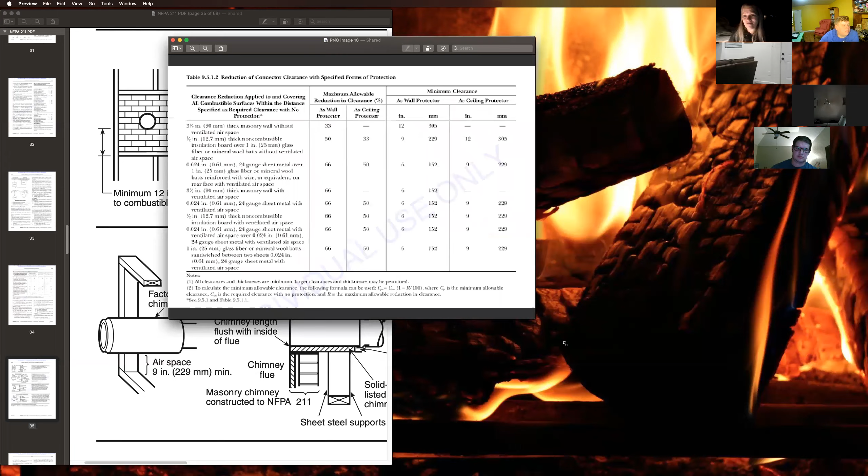I'm just trying to make sure I know what you're talking about. What's a breech? Breach - is that how you pronounce that? Yes. I'm pulling my Latin out, pulling out some of this stuff like pyro.

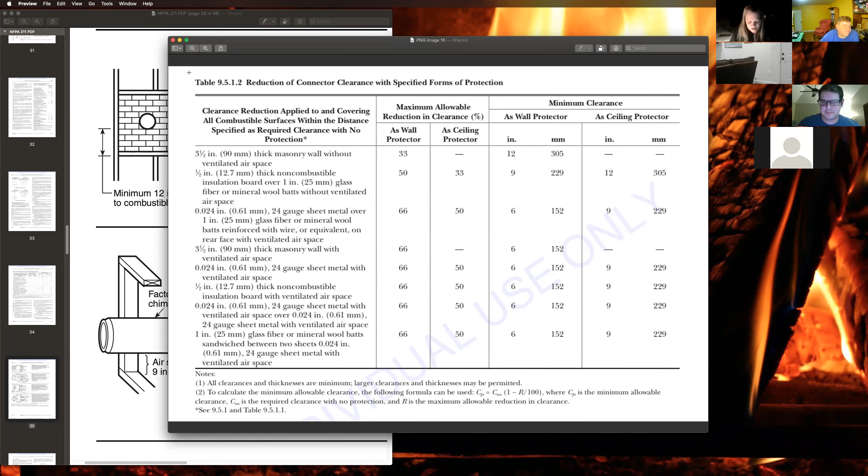24 gauge sheet metal with ventilated airspace reduces by 66%. If that's being used to ventilate stovepipe for a wood stove, it's reducing from 36 inches down - 66% is 12 inches. So if you're using a 24 gauge sheet metal thimble with ventilated airspace, it reduces by what? 66%.

Oh, I've got a lot of flashcards to write.